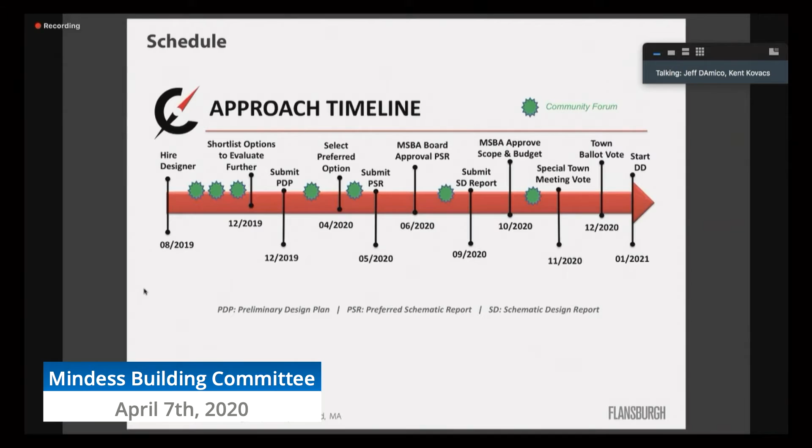I'm going to let the design team talk - they're going to do the majority of tonight's presentation. Then you'll hear back from me again at the end when it comes to cost and next steps.

Great, thanks Jeff. This is Kent Kovacs, principal architect from Flansburgh Architects. What we want to do with the presentation tonight is walk you through the project considerations, the options that have been discussed over the past months, and an overview of the feasibility study.

I'll be joined by the project manager from Flansburgh, Bill Beatrice, as well as our sustainability consultant, Ryan Montani from The Green Engineer. When we go into project considerations, there were 3 main variables that we studied - that was the bulk of the feasibility study.

And this is our 5th community forum, so if you came to any of the others, you'll see these topics were highly discussed. The first is the grade configurations.

As part of this MSBA, Massachusetts School Building Authority building project, 2 grade configurations were studied: a 635 enrollment serving grades 3 to 5, and a larger grade configuration serving grades 2 through 5 for 845 students. The school committee and school building committee agreed that the grades 3 to 5 configuration was the best choice.

Also, there were 2 sites evaluated as part of the feasibility study: the existing Mindess site and the middle school site. Many options were explored at both sites, and the goal was to leave no stone unturned.

We wanted to look at a code-compliant option that's required by the MSBA at the Mindess - what it would take to bring that school up to code without any educational additions, no additional classrooms to meet state standards, just bringing the building up to code with the building systems. We looked at addition/renovation options there, as well as new construction options at both the Mindess and the middle school site. Bill Beatrice will walk us through some of the challenges at both those sites.

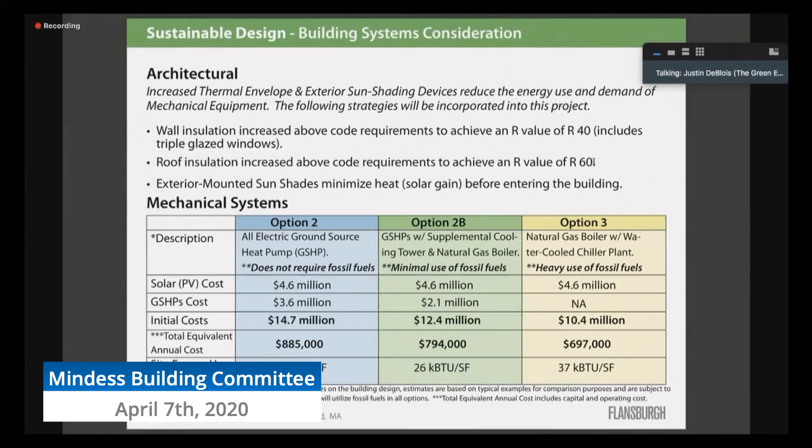You can go to the next slide.

So a little bit more detail on option 2 and option 2B. Option 2 is all electric except for the emergency generator. We're estimating about 100 ground source heat pump wells, which would cover 70,000 square feet of site area, and that could be put under a parking lot or some other type of dual use area. It requires a 750 kilowatt generator for backup power, and adds about 2.3 million to the project cost.

So option 2B is the baseline for the cost estimations. It's estimated to provide about 50% of the peak load for heating and cooling using the ground source heat pumps, but that system would also provide more than 80% of the annual load. So the supplemental systems would only really be used on peak heating and cooling days, whereas the high efficiency system would be used most of the year. And that requires a much smaller backup generator.

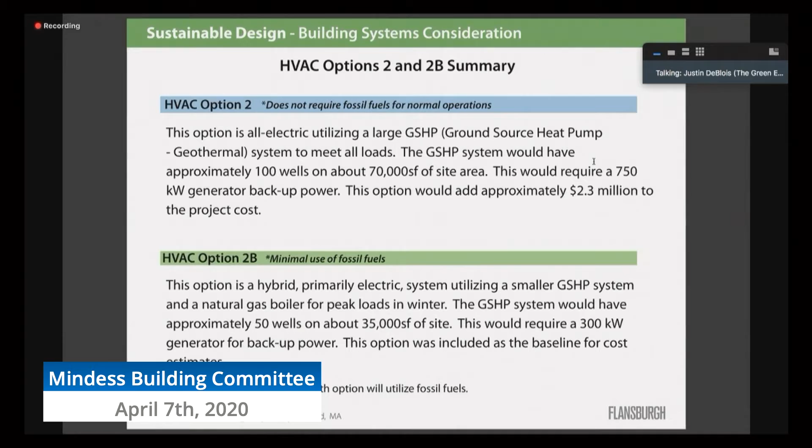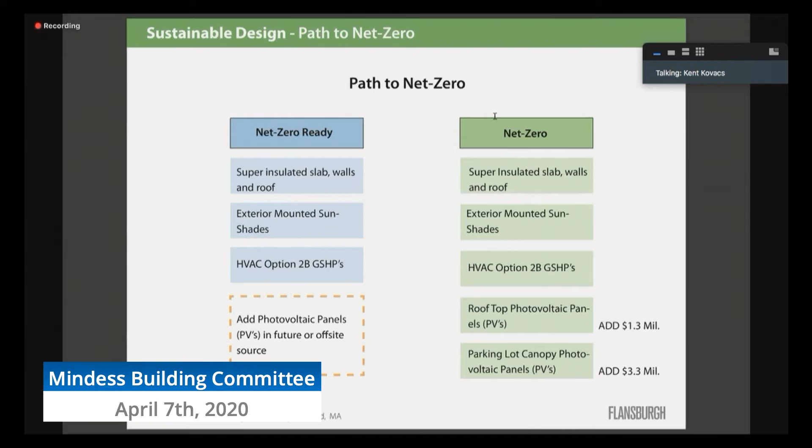Thank you, Ryan. This is Kent from Flansburgh, and I just want to touch upon these two paths you see side by side—the additional photovoltaics that would bring you to net zero. Just to summarize this slide, I want to transition to another important part, the educational plan, and Principal Cairo will walk us through the timeline and conversations that have taken place that bring us to today.

Yeah, sure. We've discussed this many times, but just to review, we've had many different discussions and conversations with folks, from small group meetings with the building committee to larger group conversations that included folks from various community organizations during our educational visioning meetings, which were led by David Stephen and New Vista, who came in to help us organize these events.

Through that, we were able to ultimately come up with the grade configuration, and we made that determination through a lot of thoughtful process. That was brought forward to the school committee, and after looking at both the 2 through 5 configuration and the 3 through 5 configuration, we decided it's in the best interest of the Ashland Public Schools and the community at large to stick with the current 3 through 5 configuration. That was voted on after a recommendation by the school committee.

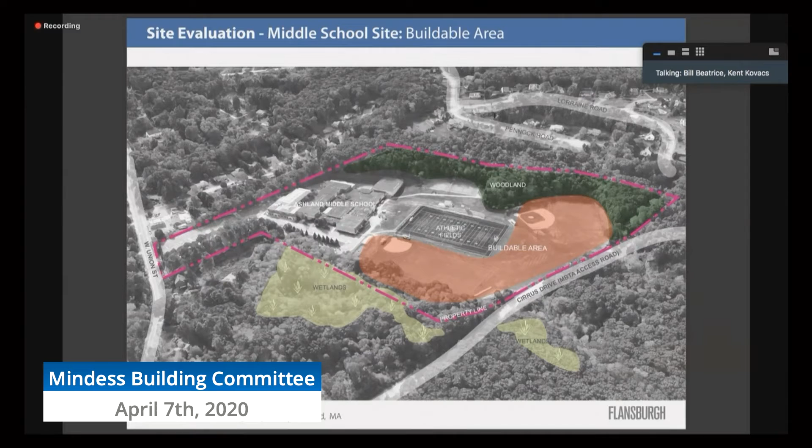Well, thank you very much. My name is Bill Beatrice from Flansburgh. As noted earlier, we looked at two different sites—the middle school and the Mindess site. Looking first at the middle school site, in general it's a tight site with some constraints from wetlands and buffer zones, but all in all we do have a workable, buildable area, highlighted here in orange.

So how does that logistically play out on a proposed construction on this site? If we go to the next slide—what we're proposing, or one option, would be to locate a new building on the existing ball field, which this building would displace. With any construction activity on an existing school site, that construction zone would be fenced in with gated access, limited to certain times during the day.

Looking at access to the site off Union Street, we'd need to enlarge that drive a bit, because we want to separate construction traffic from school traffic, so we'd have to widen that and fence those areas off. One challenge would be the long utility runs—you can see the existing utilities in yellow as they come off Union Street and feed into the existing middle school. Any new building in that far corner adjacent to the football field would require continuing those utilities around the field into the new building. So some challenges there, but a workable site nonetheless.

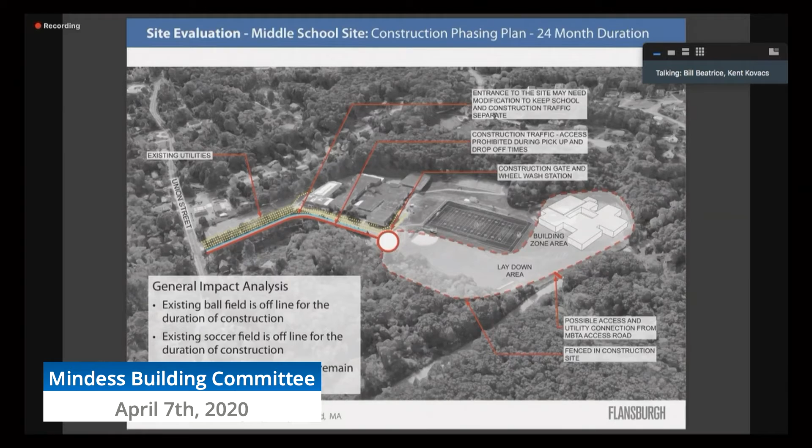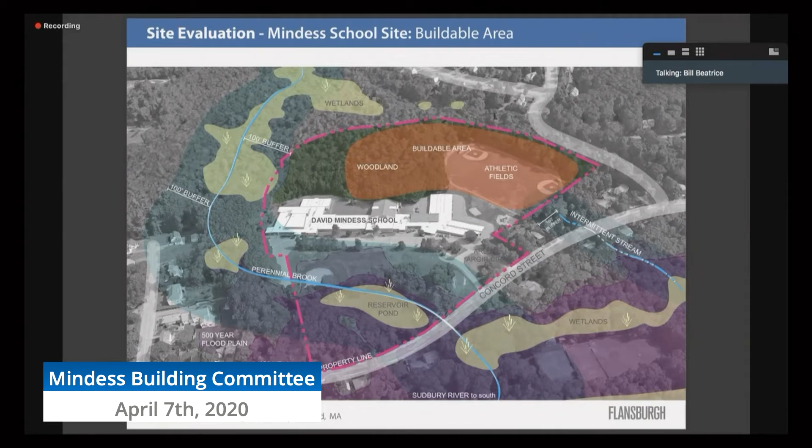Looking at the Mindess site, a similar situation with adjacent wetlands and buffer zone, but this is a much bigger site, giving us a bigger buildable area, highlighted in orange similar to the middle school slide. Logistically, how does that work with a construction project? If we advance that, we can take a look—you could just forward the slide.

Do you see it forward? What do you see on your screen now, Bill? Oh, I see it, now I got it. Yeah, it's forwarded, so you can keep on talking.

So again, we'd have the fenced off building zone behind the existing middle school, Mindess school. It would be a fenced in, gated area with limited access during school hours. Similar to the middle school site, we'd want to enlarge or modify the entrance off Concord Street to separate school traffic from construction traffic.

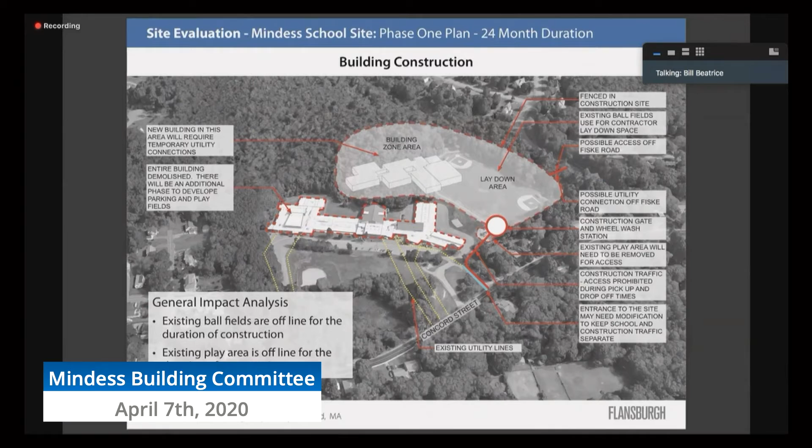This scenario involves building a new school behind the existing Mindess school, and once that's complete, the Mindess school would be demolished. So this is a two-phase construction scenario, and the second phase would involve development of those play fields. One nice thing about this site is it's a bit larger than the middle school, giving us the opportunity to develop more of the surrounding site for school and town use.

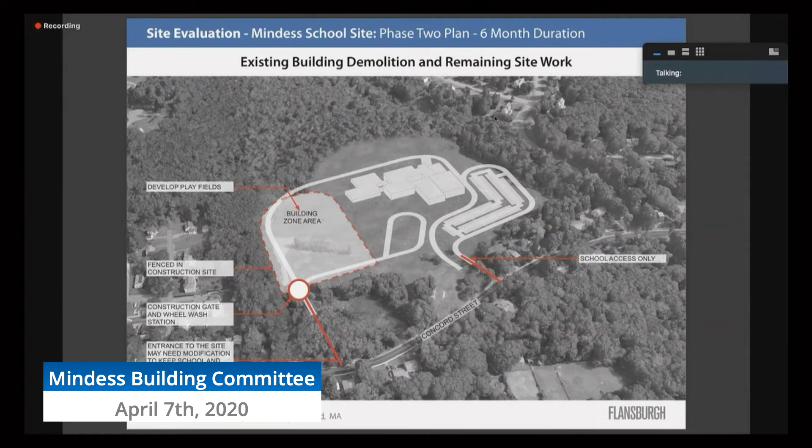Great, thanks. With this, I'll turn it over to Kent to walk us through some of the design alternatives to these sites.

Thank you, Bill. We're going to bring you through the feasibility study going back many months, starting with the middle school. Many options were explored there, and we looked at both the larger school enrollment of 845 as well as the enrollment of 635.

We tested many options and had about 9 acres to play with around the existing field. The building honed into the northwest corner, where the baseball fields are now. When planning this, we were forced into a smaller footprint, and we even looked at 3-story options, which were presented at the last community forum, though I don't think that necessarily resonated well with anybody compared to what the Mindess school can do.

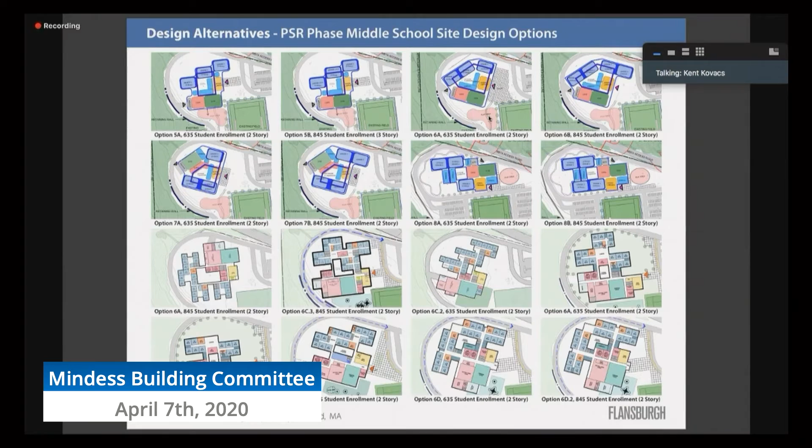Here are a variety of different configurations and layouts studied, and the one that rose to the top was option 6A, based on a 3-pod configuration with grades 3, 4, and 5 on the first level, repeated on the second level. This ended up being the best layout for the academic wings that met the educational vision.

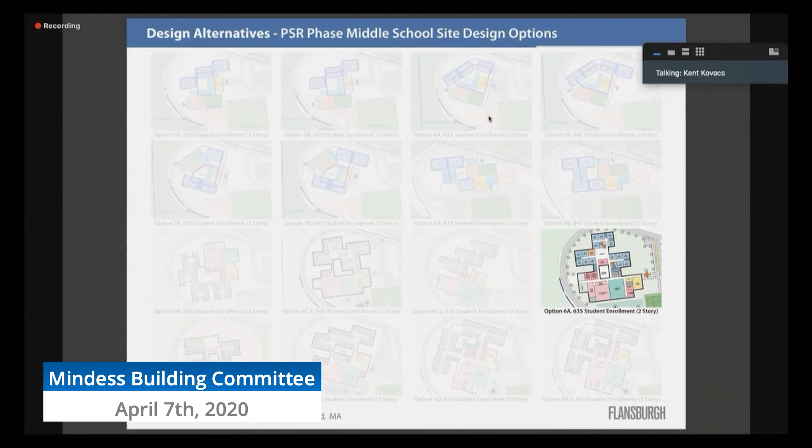Let's take a look at what this option looks like. Our constraints included the MBTA access road to the north, the existing multi-purpose field, the tennis courts, and topography, which placed our building in that northwest corner. We had new parking on the east and north sides of the multi-purpose field, as well as a dedicated bus drop-off and parent drop-off looping around the entire building.

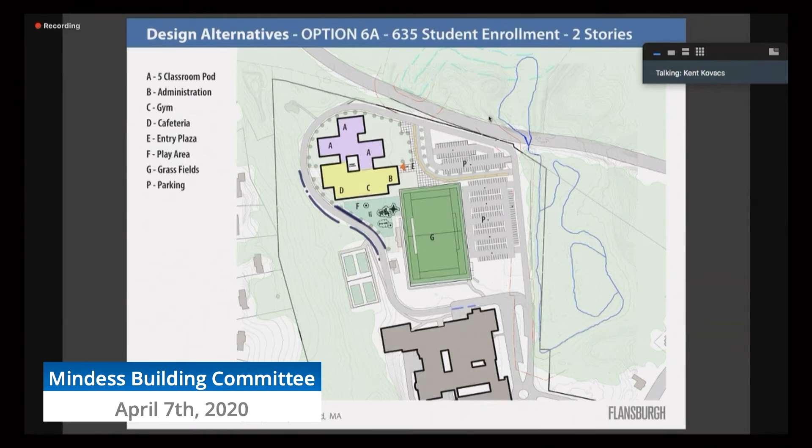And then shifting to the Mindess site, here we had studied a variety of new construction options similar to the middle school with 635 student enrollments as well as the 845. But here we have the existing school, and part of the MSBA process is that you evaluate addition renovations, of which we had 2 primary options, option 4 and option 3.

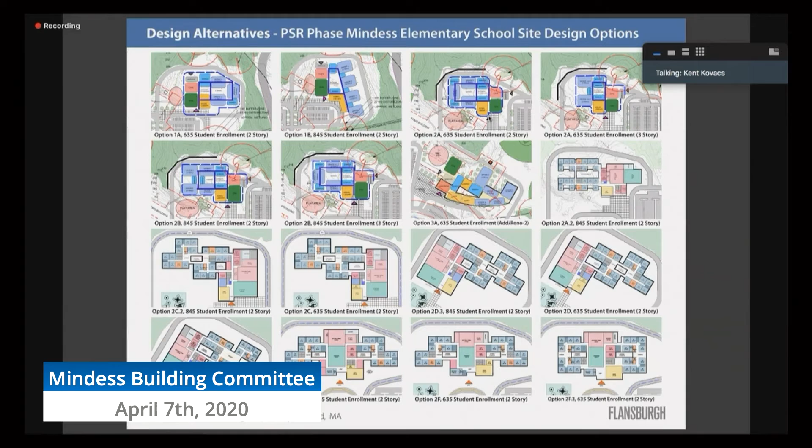But again, many options were explored, and option 2D2, which was positioned slightly north of the existing Mindess, rose to the top. This was the option that the school building committee is recommending as the preferred option.

It's a 2-story building. Some of the educational opportunities, through all the visioning sessions that the principal had walked us through in that timeline, there's a real understanding that there should be great support for community spaces as well as educational spaces, that 3-pod configuration aligned with the educational plan, an option that promotes student and teacher collaborative areas.

Because there's more area at the Mindess site, there's more flexibility in designing the site, but also future growth and reconfiguration. So if there's ever an addition, there's more flexibility at the Mindess site. Another big benefit was because there's more room, we're able to conveniently and securely access community use spaces such as the gym, cafeteria, media center, and other spaces after hours and on weekends.

And then with the building and site opportunities, it replaces the aged Mindess Elementary School. Again, there's a lot of site area. This project develops over 16 acres on that site between the school and site amenities.

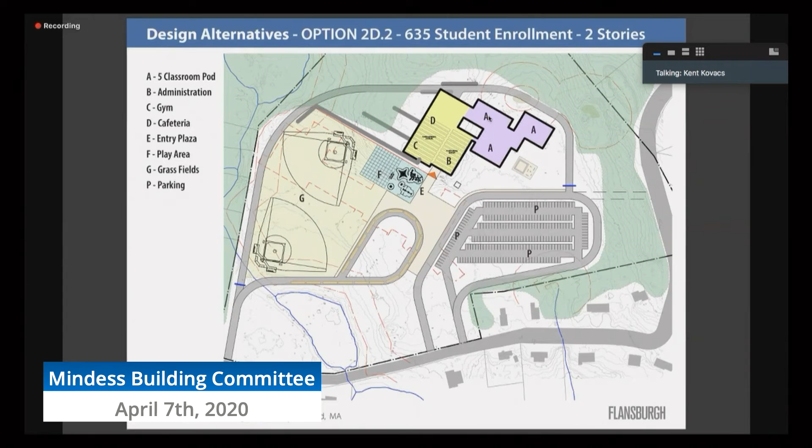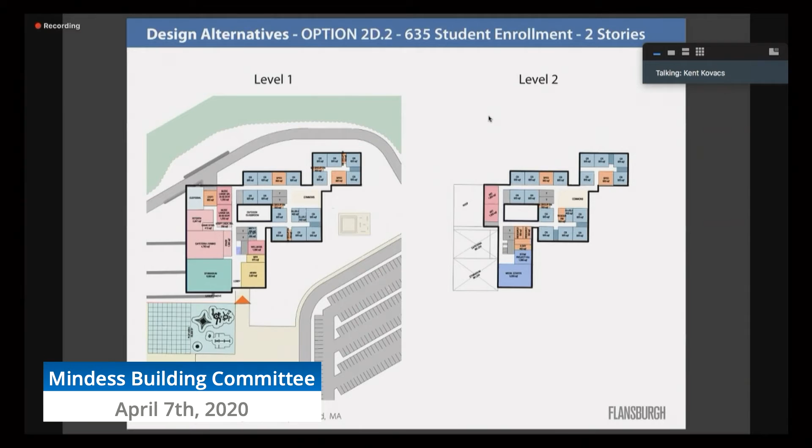This is a diagram as we get into a little more detail of the parts that go into this building, focusing on the academic portion. Overall, there are 30 classrooms in this new building, general classrooms as well as special education spaces highlighted in orange. Within the academic area, each grade would have 10 classrooms.

There would be a 3rd grade academic house, a 4th grade academic house, a 5th grade academic house on 2 levels. What that allows is vertical alignment with the same grades within the academic house, but also a unique opportunity around this common space for all 3 grades to come together.

And Principal Kyra, if you want to expand on the importance of that 5-pod configuration, it'd be a great opportunity. Yeah, sure, happy to.

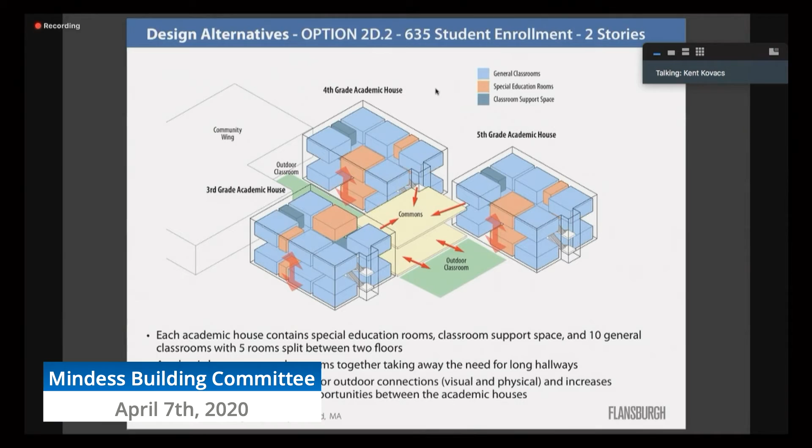Great, thank you very much. This is just the beginning of exploring possibilities here, and it's very exciting. Now that there's a recommended option, we're going to begin exploring more of these opportunities. Thank you very much.

Now we're going to shift over to the cost estimates for the project, and I want to lead into the overall scope and summary. With the grades 3 through 5 configuration, the building is approximately 105,000 gross square feet. The project also consists of demolishing the existing Mindess school at slightly over 100,000 gross square feet. Because you're at a larger site, there's more flexibility for development—approximately 16.6 acres—and that'll get flushed out as the project's refined.

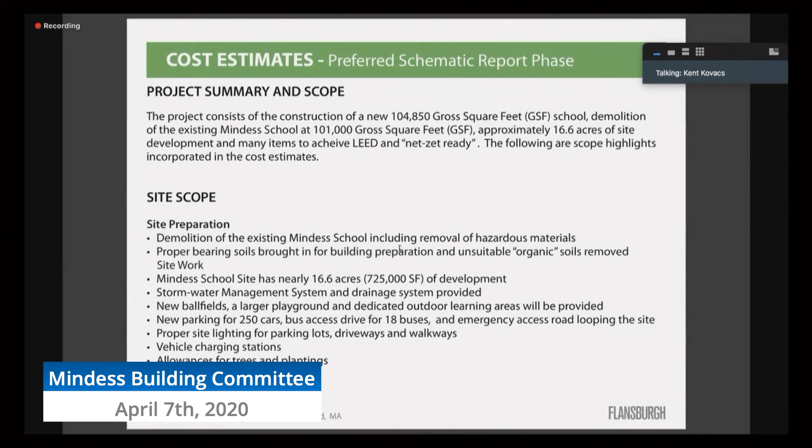One of the important factors is sustainability, so we've built into this base cost what it takes to be net zero ready. As for site scope, it's a bigger site, so we have stormwater management systems, and we have to make sure the soils are proper for the new school, new ball fields, play areas, parking, bus loops, lighting, and vehicle charging stations. We are going into the wooded area a bit, so there's a good allowance for trees and plantings as far as developing at the Mindess site.

When we get into the building, the Massachusetts School Building Authority has a space template that's a recommendation, but they want each district to make it their own. They provide a gymnasium that's 6,000 square feet, but what we've found in the past is it's very difficult for day-to-day activity within that gymnasium, especially after hours supporting after-school functions and different community uses. 6,000 is a lot, yet very tight to accommodate those activities. So an additional 2,000 square feet of gym space is on this template, matching what you currently have, so this project is going back to the MSBA saying it needs 8,000 square feet because that's what you currently have, and it provides space that will satisfy the activities you're doing there.

It also has option 2B with geothermal, a backup generator, LED fixtures throughout, a super insulated envelope and roof, as well as miscellaneous building components such as built-in cubbies within the classroom rather than metal lockers in the hallway, and allowances for premiums for flooring, skylights, and speech reinforcement. We've put in a lot of pieces here, and of course every building will be code compliant and ADA accessible. We just want to capture some of the main highlights that typically come up during conversations about what's in the building.

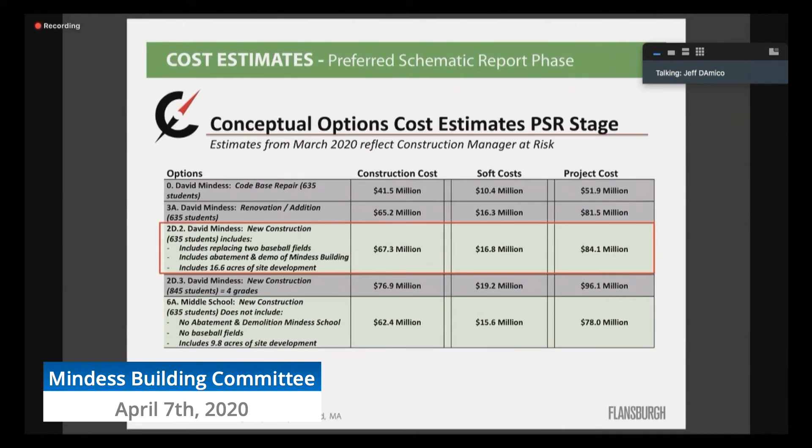From a big picture standpoint, we'll be entering schematic design after we make this submission, which will bring us through the summer and into the fall. In September, we'll wrap up the final schematic design. At that point, the building committee and other boards in town will have decided on the final scope, size, and cost of the building to ask the taxpayers to vote for and ask the state to approve.

Through the fall, it'll go in front of the Mass School Building Authority for their approval, and then in front of the town for a town meeting approval as well as a ballot approval. Once that's all completed, the project would then kick into full design in the January timeframe, moving forward through design development, permitting, and construction documents.

We'd look forward to break ground in the early winter, December-ish of 2021, with a school opening in September of 2023. Because it's a new school on the Mindess site, the demo and abatement would happen at the end of the project. So we would complete the new school, open it with a temporary circulation pattern, then demolish the old school, abate it, and replicate those ball fields with another 6 to 9 months.

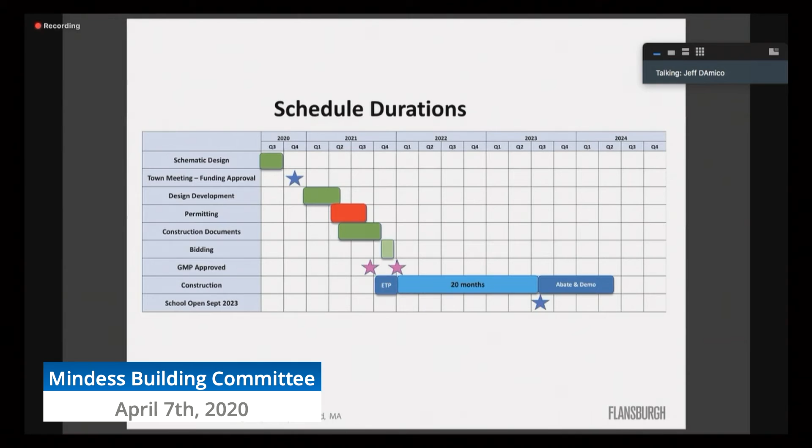And then next we'll talk about the upcoming near-term schedule implications, essentially completing in August of 2023.

So where we are near-term, the next step after tonight's forum is to go back in front of the tri-board to collect the Board of Selectmen and the school committee's vote for recommended approval of this option. From there, the building committee will vote to submit the package to the state by the end of the month, and we'll make that formal submission electronically on May 6th.

The MSBA will then vote to agree with the preferred option as presented by the school building committee on June 24th. That'll allow us to continue with the detailed design in June and through the summer, culminating in a September 9th submission for schematic design, and ultimately a town funding vote this fall for scope and budget at the ballot and town meeting.

So with that, I know we've provided a lot of information tonight. I'm going to turn it back to Paul for the wrap up and Q&A, and we're here to answer any and all questions.

Thanks, Jeff. So before I solicit any comments or questions, just an idea of what it is that we are doing tonight. No decisions have been made. The building committee is a recommending body here. Our charge is to lead the town through this process with the state.

Through that process, we have made a recommendation. The recommendation, prior to being submitted back to the MSBA, is required to have a vote by both the school committee and select board. We're also asking the FinCom to weigh in as well, because I think that's a very important body that we'd like input from. So that's why we're doing it at the tri-board. One thing to note, that's a standard question people have.